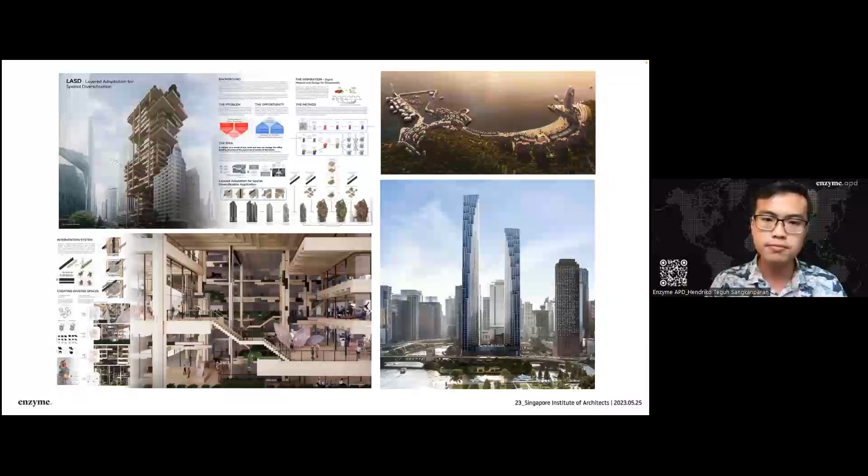In our design firm, we are a group of experienced designers with international experience and a detail-oriented process. We work across different scales: master planning, architecture, interior design, crafting our concepts and design to our clients' needs, bringing together our design expertise with our clients' values and expectations, creating sustainable design environmentally, economically, and socially.

At our core, we are digital consultants. We are digital savvy and passionate about how things are done. We have a research group within the company that explores new workflows and techniques, from BIM to computational tools that we use every day, and we also offer this as a service to our clients.

We are BIM and technology advocates. We are in Hong Kong, an official Archicad training center, and we are BIM experts. Since 2015 we've been the official Archicad training center in Hong Kong, and within our team we have certified trainers and registered BIM consultants. We also travel the world giving lectures and conferences, sharing our experience and inspiring other professionals to work better with BIM, always attempting to stay on top of new tech that improves our quality of work.

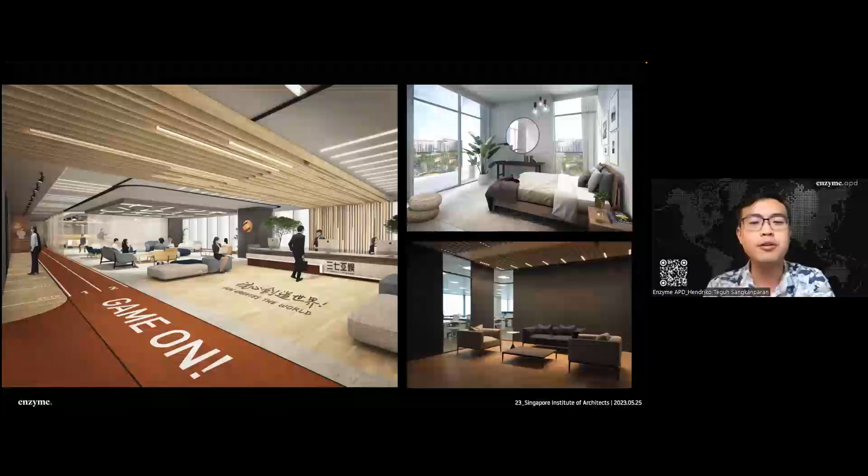We work across various scales: master planning, architecture, interior design, crafting our concepts and design to our clients' needs, bringing together our design experience with our clients' values, from outside, inside, to the smallest details. The philosophy of parametric design allows us to control and expect what is designed, and we have this freedom powered by data and BIM.

If you've looked into computational design, you've definitely already experienced this ability to know exactly what you want and be able to expect the result you want, which is super cool.

At Enzyme, we use Archicad for design to enable our process and create smarter workflows, supporting the integrated design delivery, the IDD process. I'm sure everyone is familiar with this. We look into projects from start to end, and in this talk we're going to focus on how we apply sustainable design in our practice.

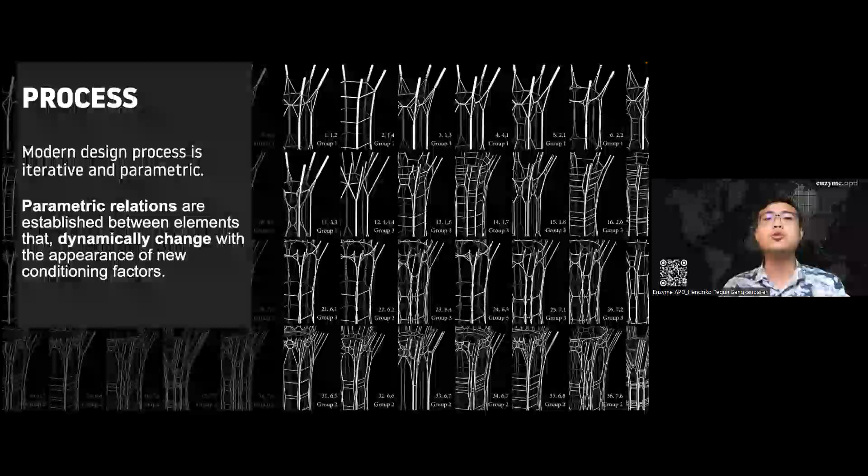With parametric design methodology, we are able to create quick iterations that have proven helpful for sustainable delivery in our projects. This is a very quick video, from a 1.5 hour webinar we did, and it just shows how powerful this is.

Basically, we just create a form, then we're able to divide the form itself and bring it straight into Archicad. With this you can see the process is extremely quick, where all the building design and building elements are already baked in as we want them to be. It's pretty cool to see how computational design and BIM can merge together to inform our design.

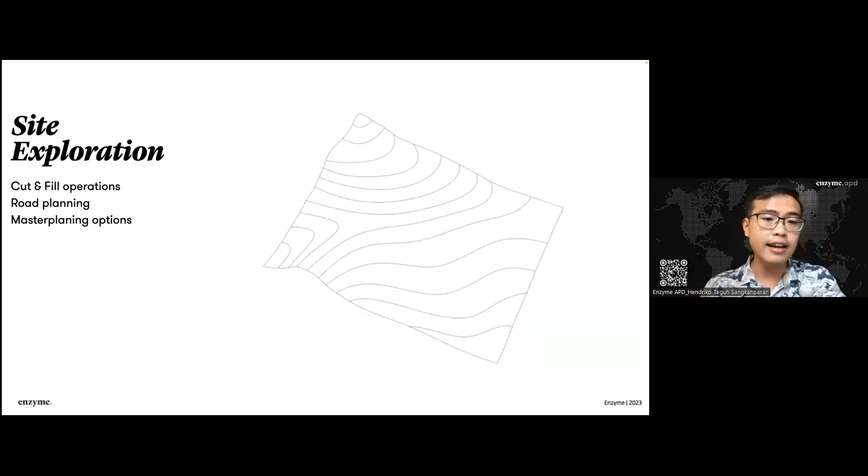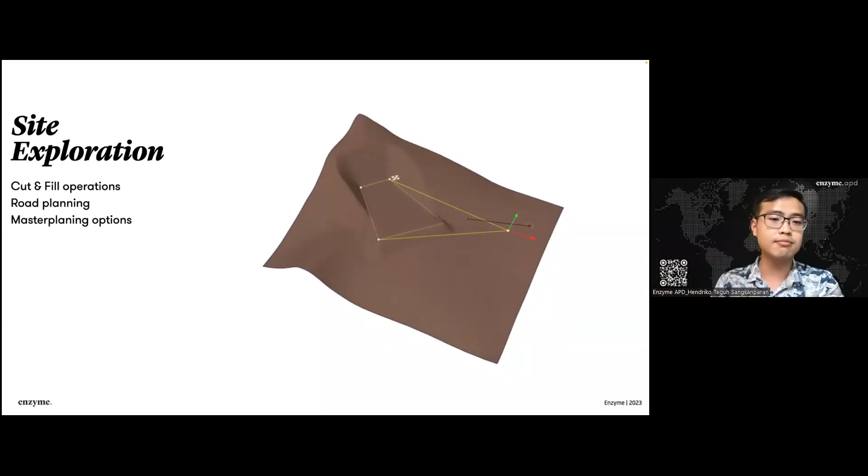Applying the idea of BIM and parametric thinking, we start from site exploration. The site is like point data, so this is just a diagram of how we can modify our sites, a very quick tool. Then we explore the idea of terraforming, because at the end of the day, when designing, we should be able to understand our site.

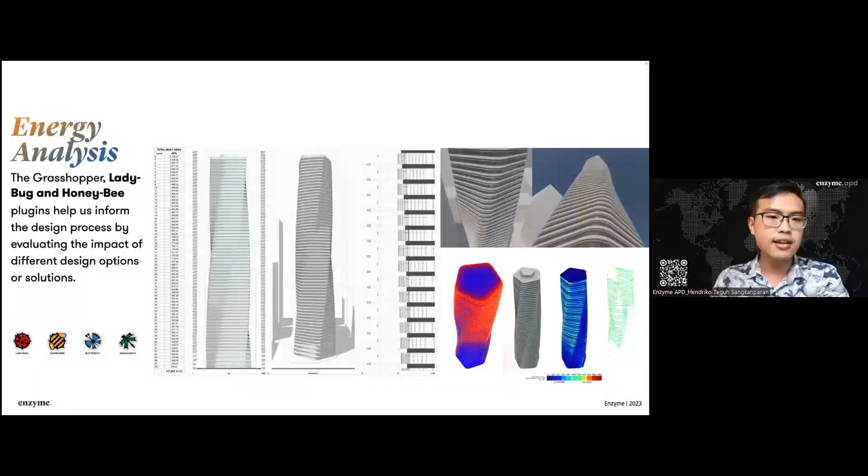We also implement our sustainable design tools from Ladybug or Eco Designer, and then we feed that back into our Grasshopper and data analysis tools to actually give us a better informed design.

And this is an example where we are using Wallacei, a genetic algorithm that enables you to find what is the right design for this kind of plot.

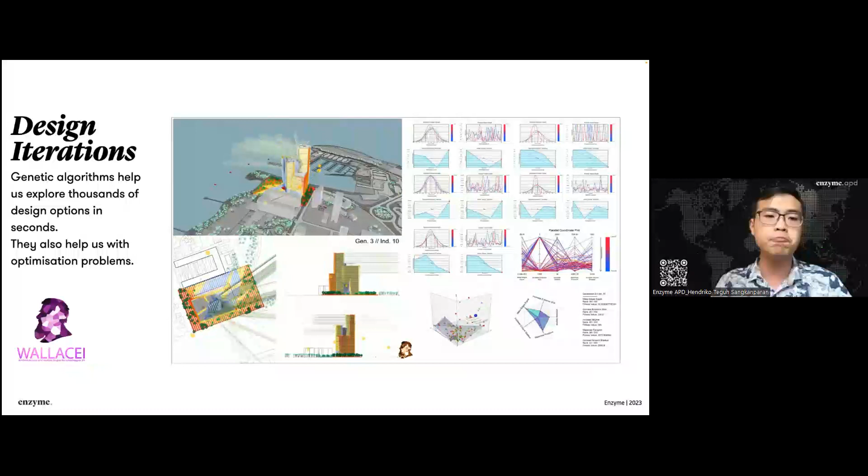And because of BIM, we are able to manage our data quite well. In Grasshopper, we also use this idea of Elefront that helps us manage the data of our elements and how the buildings actually are.

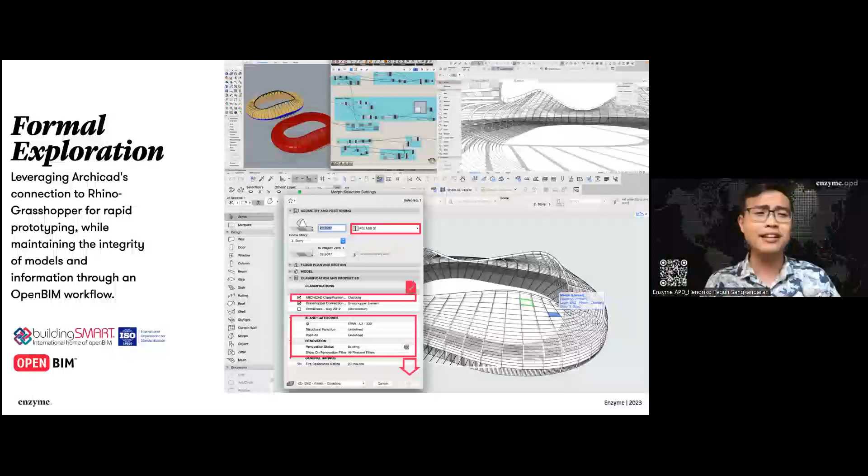So data-driven design, I think it makes sense, and this also helps us in formal exploration. Our exploration isn't messy - it's not about a line that looks perfect, no, it's about data. It's about how we can use the environment and the site to inform our best data-driven design.

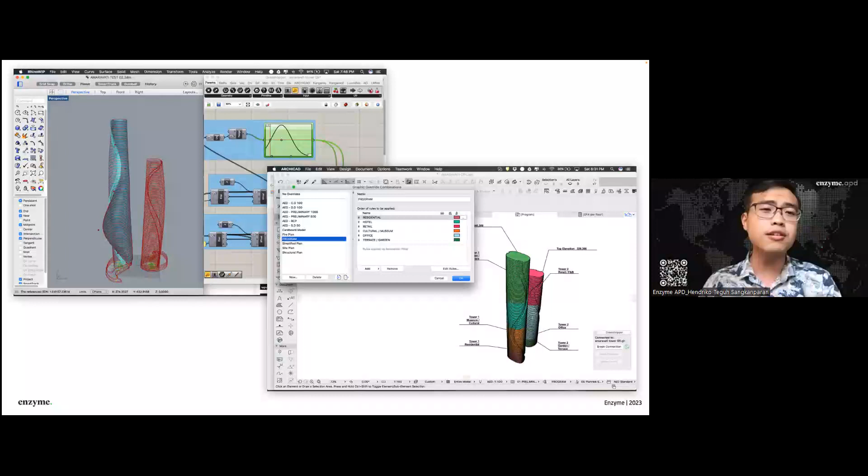So finally, this is the end of how we work. We created this hybrid workflow where we use Grasshopper and Rhino as well as Archicad to create a design that is data-driven and can also be communicated very clearly and well.

During the last 10 years of BIM and other digital tools, we have slowly made our way and changed our practice, how we work on our design, and it has tremendously improved our flexibility of designing.

BIM has changed our workflow for better accuracy, better understanding, better information, better consistency, better coherency. I believe if you've been using it, you know this quite well.

Managing information is much easier now. Instead of referring to sheets after sheets of data, cross-referencing and making sure all is correct, we can now create information baked within the geometries itself - information of material types, the material information like embodied carbon or global warming potential or anything else, all readily available for us to use within the Archicad BIM itself.

So that's how we work. This is our journey - we start from Archicad, that's our genesis, and we start to explore further, understanding the data.

We integrate Grasshopper into our workflow, and finally right now we're exploring how to use even more - using APIs of other software, using Python or Airtable to communicate our design and relate our data to whoever collaborators we are working with.

That's basically about Enzyme and about how we work.

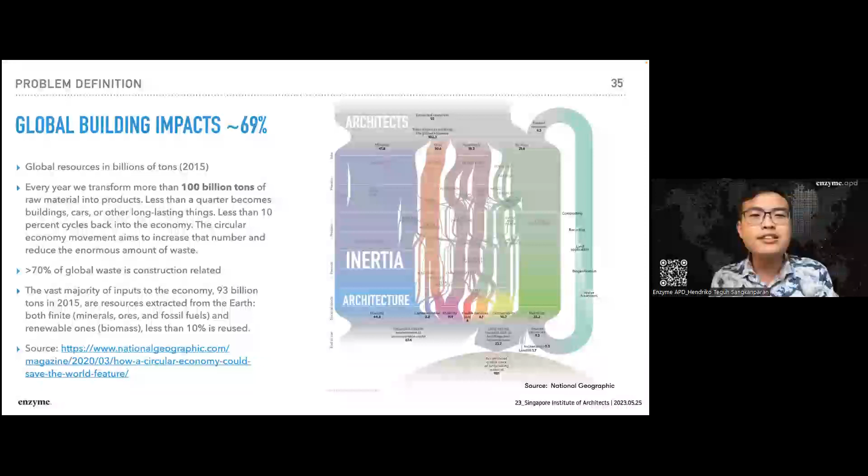In the bigger picture of world impact, our construction industry contributes the largest in extraction of materials from the earth - you see here, it's 69%. The question is, how do we make them sustainable? In the idea of circular economy, we have this idea of reusability, of how we can use the material again, but it's something we need to continue to think about.

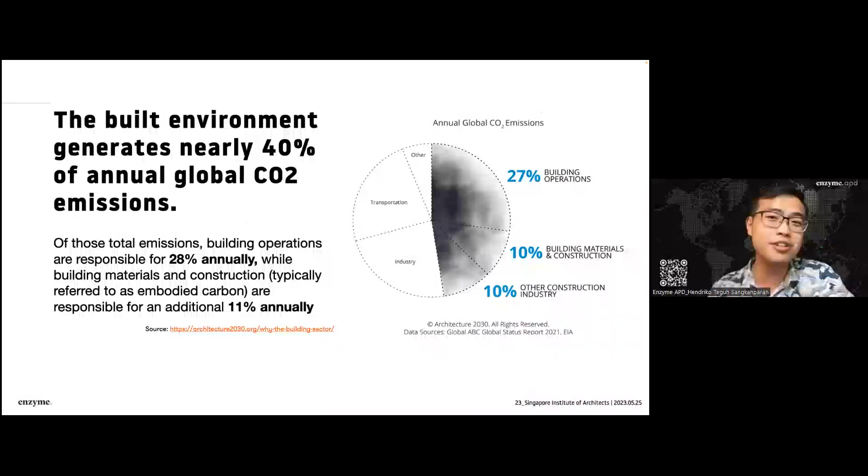So let's talk about something closer to our realm of control as architects and designers of buildings - the process of creation of buildings and their operations. Around half of all non-renewable resources mankind consumes are used in construction, making it one of the least sustainable industries in the world. This large contribution also means there's an incredible opportunity for embodied carbon reduction in these high-impact materials through policy, design, material selection, and specification.

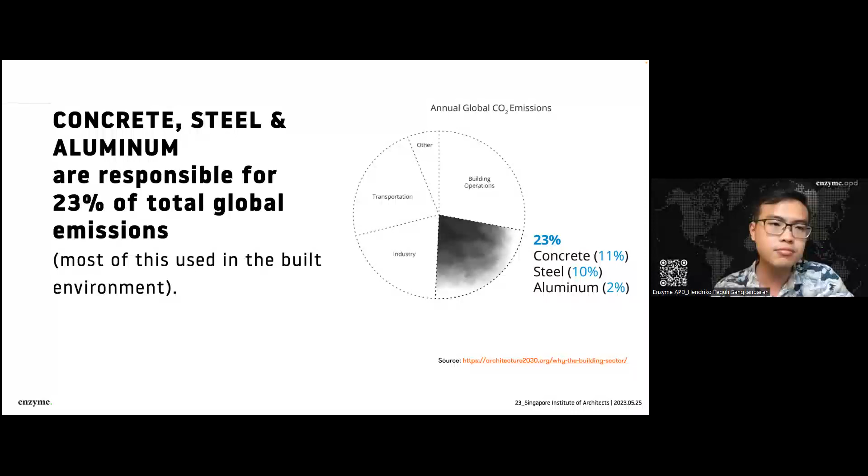So we have some examples from Singapore. Some things about Singapore - everyone is very familiar with this - it's heat, humidity, rainfall, UV, and also at times very chilly wind. I think right now, at least from my window, it's quite nice - it's very cloudy, not as hot as yesterday.

But in bioclimatic design to be effective, we need to focus on preventing the building envelope from overheating in the first place. That's what we should try to do.

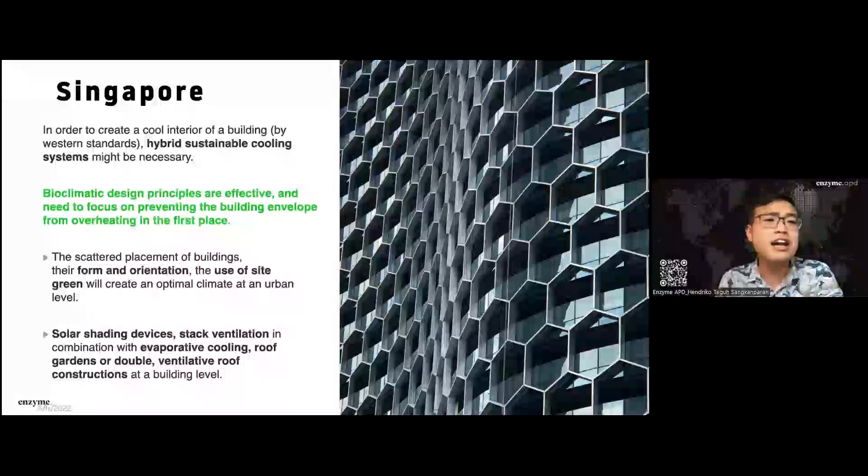Most of you might be more familiar with this project than many of us, but we really like the idea of how we can enhance building with technology that helps us achieve our sustainable goals, combining regional architecture and new technologies, creating synergies and good design for occupants and the environment. We believe as designers of the built environment, we should be inspired by each other and how we can make our world better. So now I'm going to talk a bit about the BIM world.

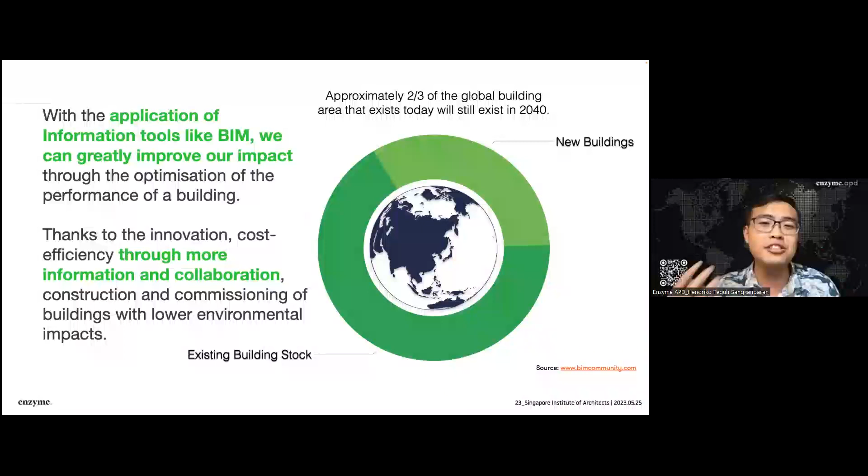The pursuit of sustainability has become one of the principal design objectives in our construction industry. In response to this concern, the integration of building information modeling, BIM, and sustainable practices could have helped us a lot. The built environment cannot escape its responsibility for contributing towards environmental deterioration and destruction of arable land. Luckily, we are living in a world where BIM can assist us. With the application of BIM and understanding its inherent power, it will greatly impact our role in optimizing the performance of a building. BIM is rooted in innovation, cost efficiency through more information and collaboration, construction and commissioning of buildings with lower environmental impacts.

Borrowing sustainable design philosophy from the US GSA, when we think about sustainable design, we should attempt to make decisions that will reduce negative impacts on the environment and the health of occupants. There are many ways for us to actually try to tackle it.

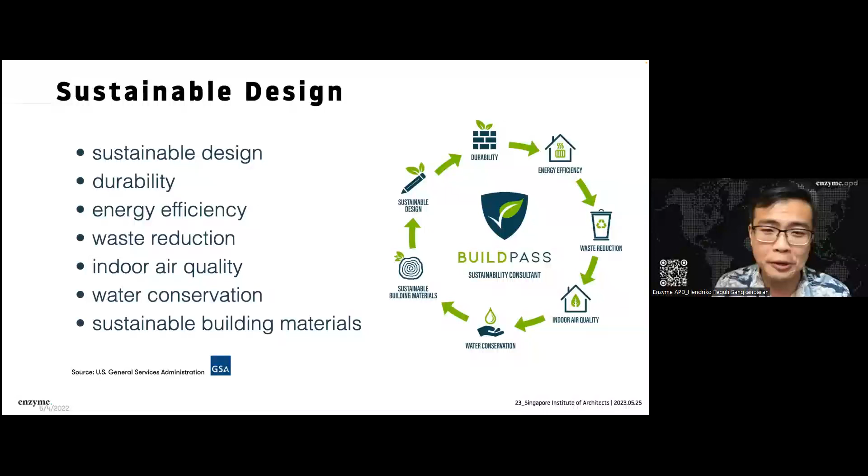Today we are not going to talk about it too much; we are going to talk about how we actually do it. Making better decisions at each stage seems to be the most critical part of achieving more sustainable design. So everything we think about when discussing sustainable design, we should try to think about how we can incorporate this idea of sustainability, how we can change small things that may actually give a lot of impact.

How can BIM help? Through information access, enabling collaboration, and simulation and analysis - these are things that BIM can help with, and I'm going to show you how. So we've already talked about the context, and how BIM might be able to help us. Now I'm going to show you how we actually use it in our projects.

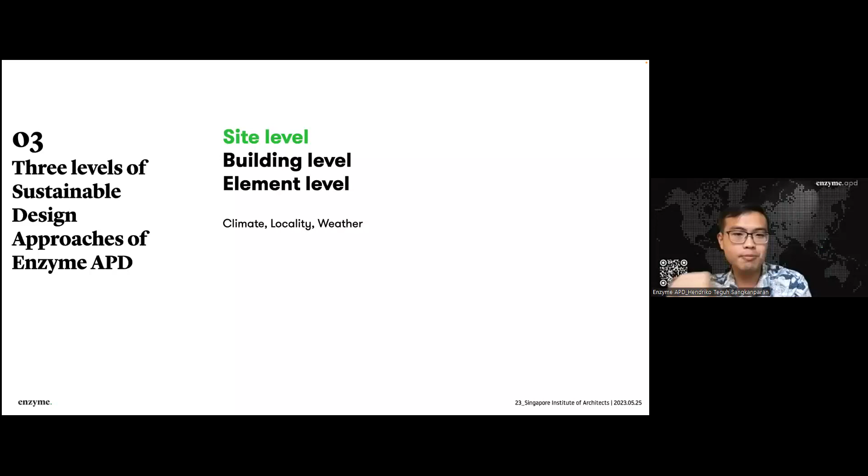First, we are going to start from the site. This project is called Linear Loop City. It's one of our several collaborations with Takenaka and its computational design team. This project won first prize in the Yilong Smart City competition in 2017. It's a great study on how companies can collaborate, giving the best of each other, creating a synergy of design. We are operating in the Archicad environment where we can collaborate across companies and across groups.

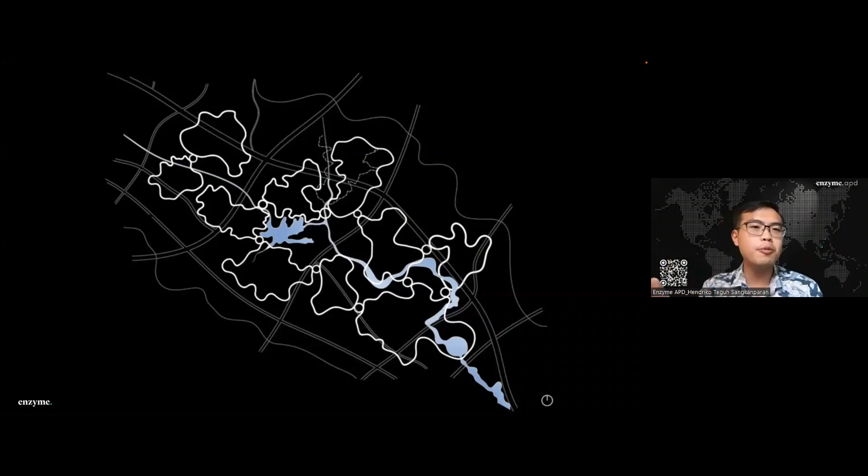The brief was to create a new smart city near Yilong County in Sichuan province, providing homes for 30,000 people, merging rural pre-existing life with the new modern concept of a city. So the idea at the start of the project was to create this loop connecting different city clusters in the most efficient way, acknowledging and respecting the surrounding landscape, because this is quite a nice landscape and topography. We wanted to make sure we didn't intervene too much, keeping the road at the same level to optimize movement of the proposed transport system using smart electric vehicles.

First, we find the best areas within the terrain with the least inclination, in order to minimize terraforming, thus optimizing investment and construction processes. For that, we created a routine in Grasshopper to analyze the terrain, acknowledging the slopes, while also analyzing the potential flooding areas. As you can see in this video, this is a running video of how we analyze the levels from the bottom to the top, and we can see there are areas that are better than others.

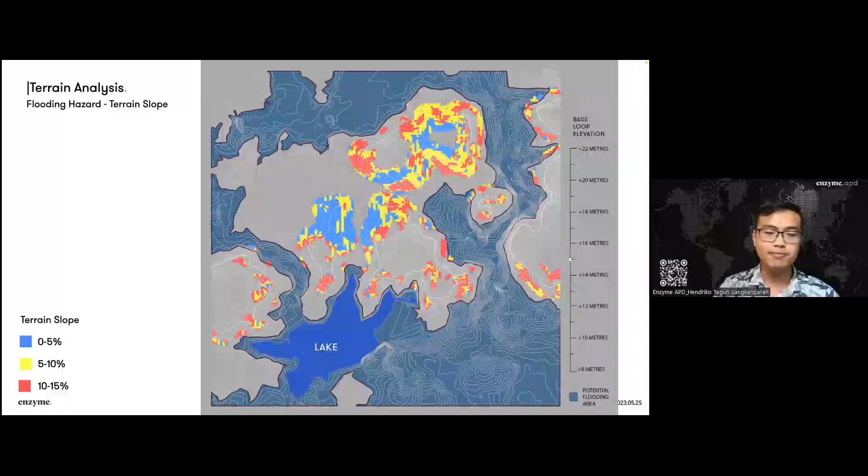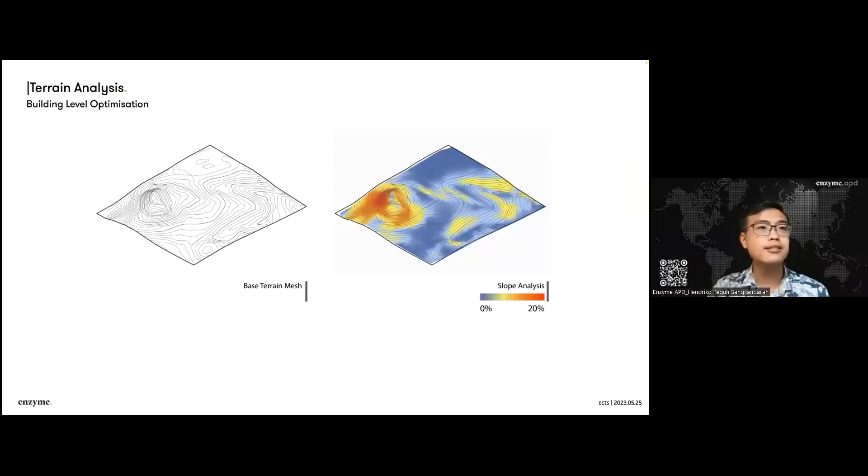Blue means it is less slopey, much more gentle, and red means it is very steep. So this is a simplified way to see our diagram. The Grasshopper script provides us the colored analysis mesh you can see here. The gray area is where the slope is less than 9%, which gives us a preferable area to take as the main level of this whole development.

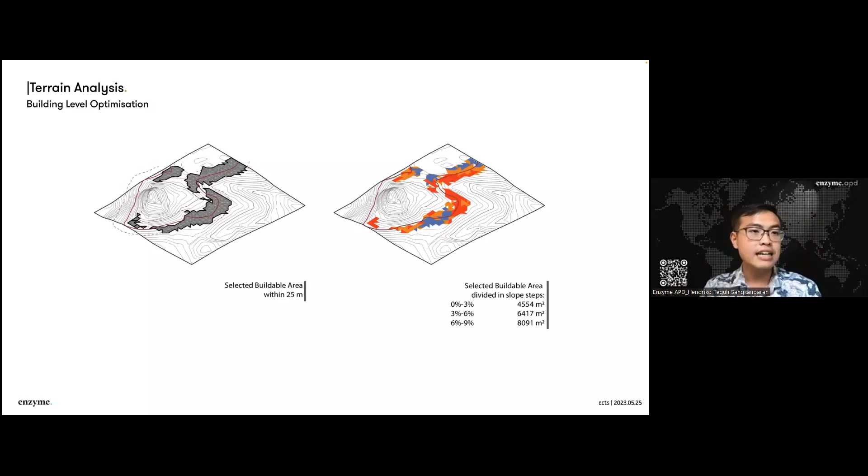After that, we also select the range of proximity of the selected road path, and we are able to see what is the buildable area when dividing according to the slope steps, as you can see in the diagram. So this is what it looks like in Archicad 20.

Now we are in Archicad 26. We can see that information is being processed quite well in Archicad, where we can see all the meshes with the terrains, and we'll be able to look at how our intervention actually is.

One of the greatest challenges of this project is physical size. It's 2 km by 2 km, full of terrain complexity. For this project, one of the most important aspects was to study the terrain, as we explained, to create this loop road.

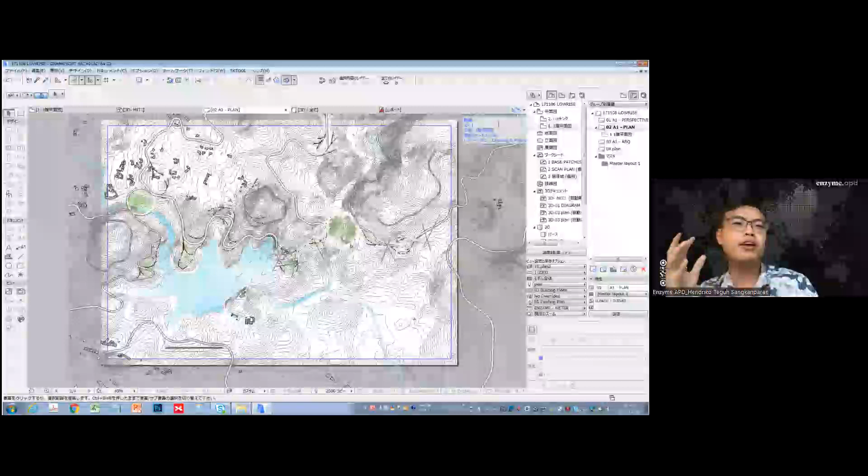Archicad can handle the meshes, but the problem is that when looking into a bigger picture, larger scale, it's quite hard to manipulate. So that's why we opted to look for Rhino Grasshopper to help us.

So this is actually a Rhino model. The cool thing about Archicad and Rhino is we can use this idea of hot link, and we can terraform the road formation in Rhino and straight away plug it back to Archicad.

This can be seen from these diagrams from Archicad. You can clearly tell what exactly is happening around this area, so if it is successful or not, you can see it straight away. It's very quick with very little post-processing.

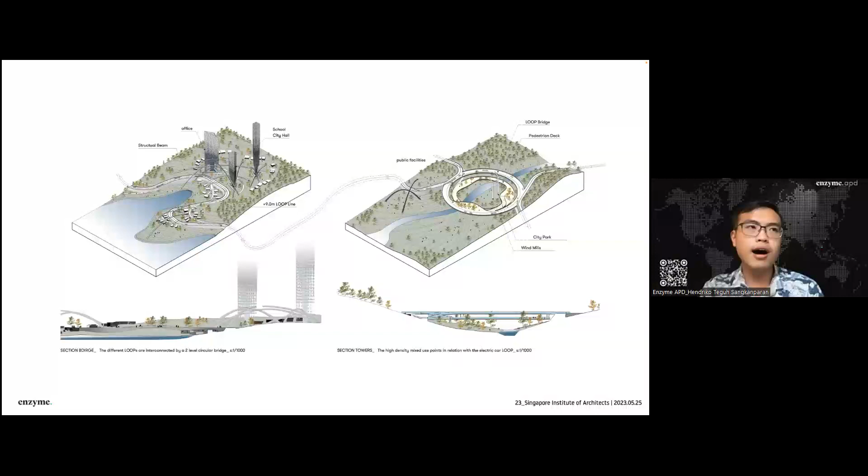So these tools really help us give a much more informed decision of how we can design. These are just some snips of the final boards.

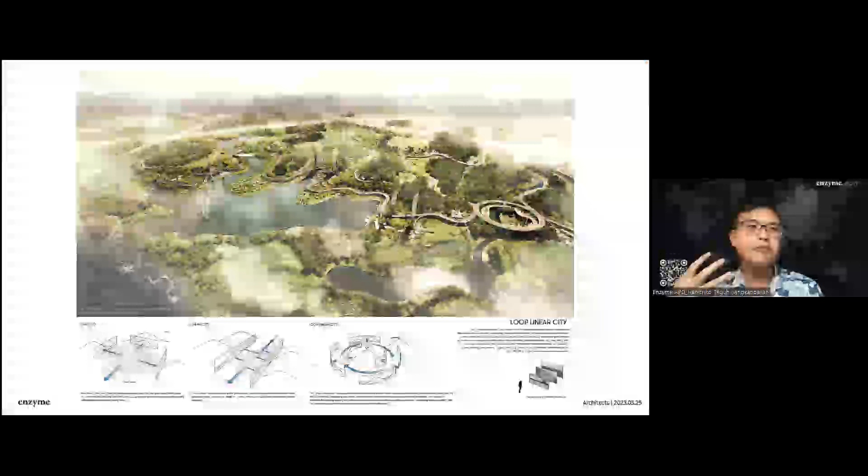The idea of this loop linear city is very important because the site is very beautiful, and we want to preserve as much as possible. This loop linear city helps us maneuver through this whole terrain instead of creating a flat land and calling it a city. Yeah, it's pretty cool. So this is how it looks like.

So with that, we talked about slope analysis to basically locate the axis of our building. We can start sustainable design from the site level. Now we are talking about the building level, which is a bit different—we are looking into deeper how the building actually works in certain site conditions.

This is a KL project, the KL Heart competition, a collaboration with Plus 8 in Kuala Lumpur, Malaysia. The tools we use are Archicad, Rhino, and Grasshopper.

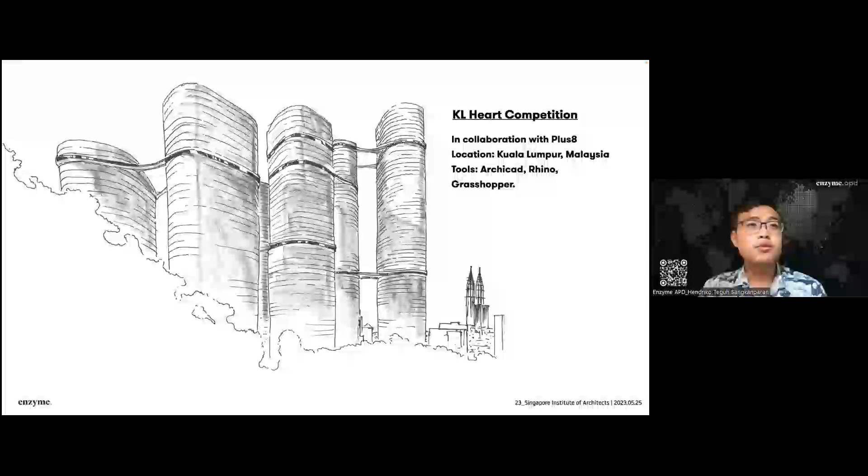This project site sits in a very prime location, just beside the Menara KL, in the middle of the Golden Triangle. It is the last mature rainforest within the city itself. It has a complex topography as it sits on a slope, as we are going to show you later.

One important feature of this brief was how our intervention sits on the whole cityscape scale, so skyline is very important. We need to make sure our design has some relationship with the Menara KL and also the Petronas Tower. It is a massive development of 500,000 square meters with a plot ratio of 14.

For this project, we would like to emphasize the importance of preserving the pre-existing condition as much as we could, because this is a mature rainforest. Our main idea is to lift the ground floor instead of creating blocks, which is common in the surrounding areas. We want the landscape to flow within the ground floor itself.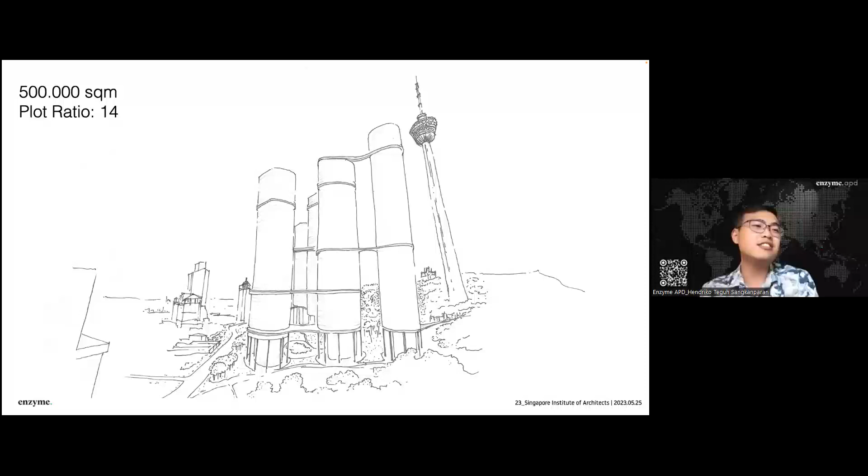So as you can see, this is the ground floor plan. We can see how the buildings actually maneuver through the landscape itself.

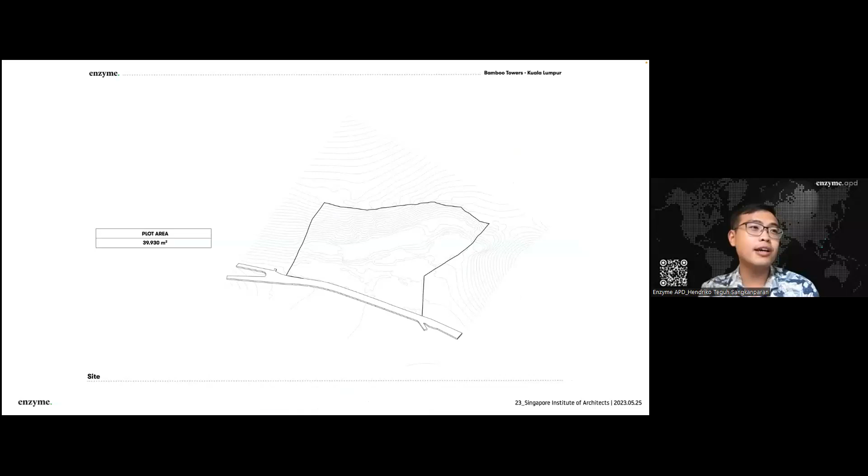So we can see, I want to explain to you a bit more about the slope itself, the site condition. So this is the site terrain. If you can see, it is actually quite slopey.

If you can see here, this is the steepness analysis. We basically look for areas where the terrain is actually the most flat. With that, we are able to locate the foot of our buildings, and with this idea we are able to make sure as much as possible to reduce the intervention in the ecosystem that we have here.

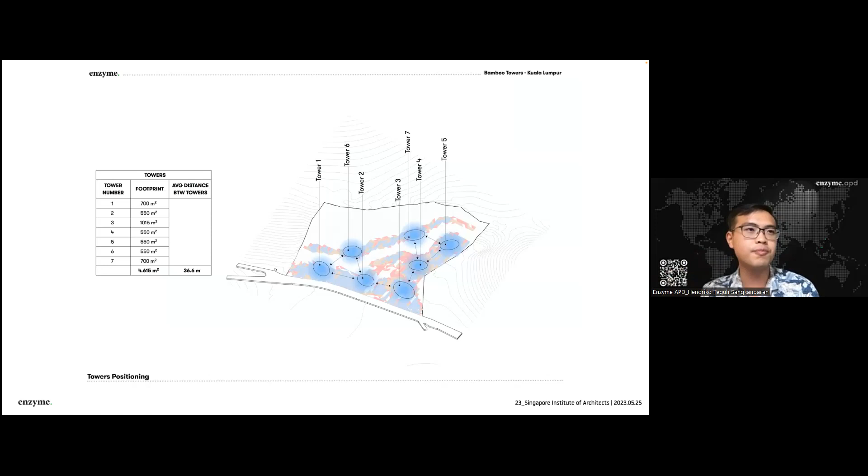So we introduced the main axis throughout the project, and this is the whole script. At the end, if you see here, it is actually an Archicad connection. So all our design that we did in Grasshopper, driven by the technology and the data, we can straight away pull it into Archicad for visualization and a better understanding of the building.

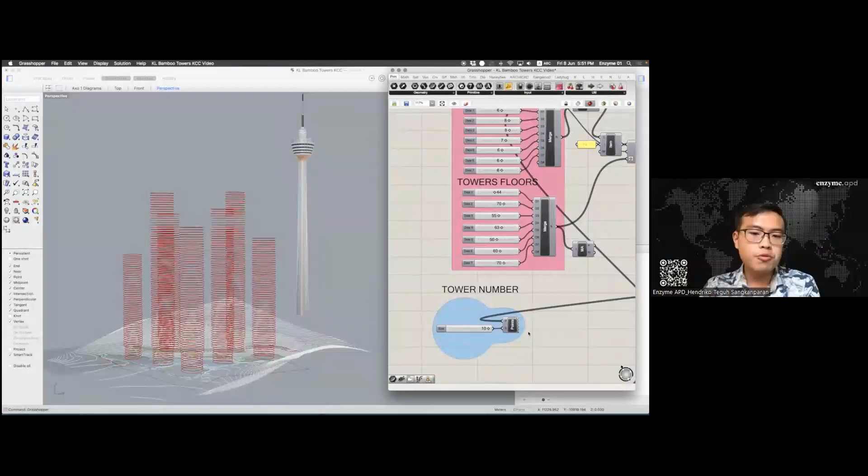So this is just a video of the whole process. This is a steepness analysis, and we are locating our site. With Grasshopper, we are able to find this location and basically create operations that help us design much quicker instead of drawing one by one.

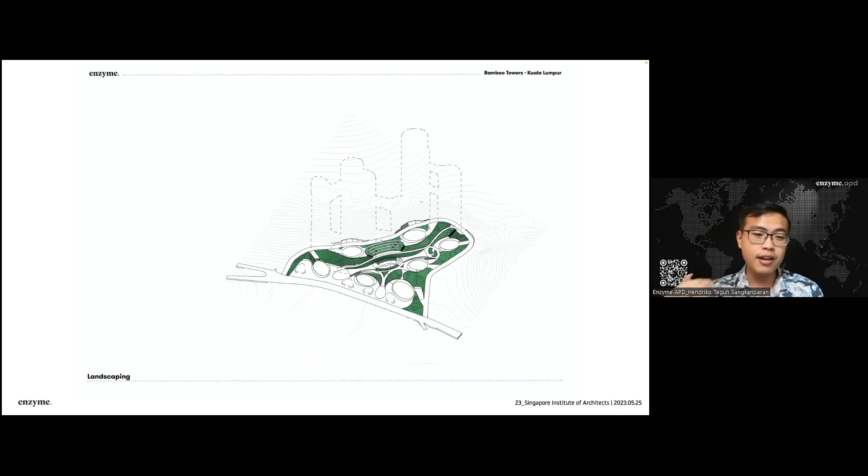So for our project, even if, for example, the site condition impact is not what we show, maybe there is better information available, we can just move our points and make sure the whole script runs again, basically creating an iteration of the design. It's very quick and very good for us because we are data driven.

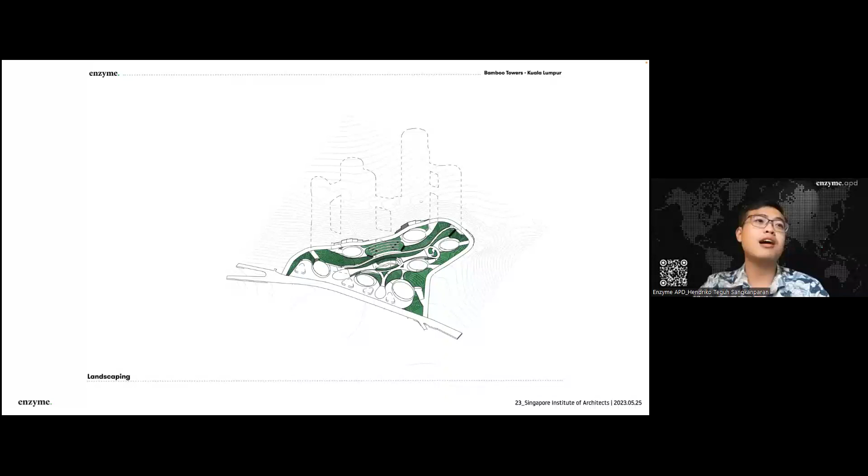So this is some diagrams that we use to explain our idea better. These are the site conditions where the greens are within the project itself. This is the automated parking, because we want to make sure we have the least road as possible. And this is the building mix of this project.

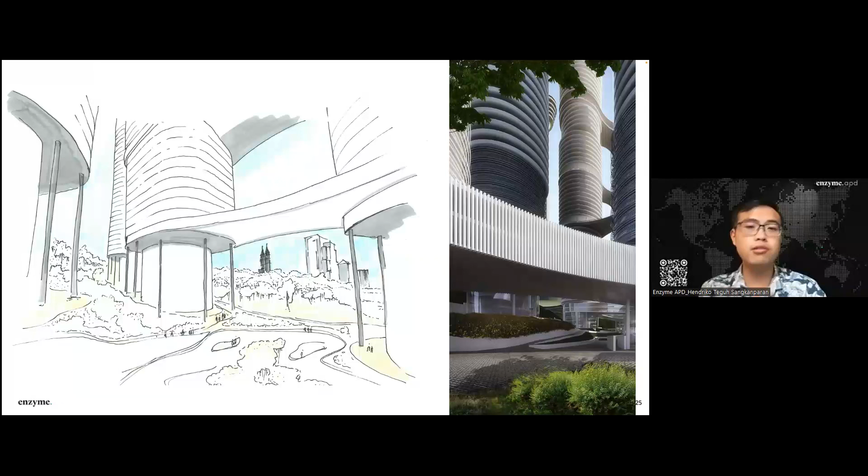And this is how it might look like when it is connected from one tower to another. So this is just some visualization of how the building is, and some sketches. And this is a render of how it sits in KL.

So that said, we talked about the site, where we are looking into the bigger picture. Then we talk about the building level, how we can place these buildings to our most benefit, and also help us create much better design reacting to the site itself.

So now we are going to show you an example of how we can integrate it even deeper to the element level itself. We are going to show you an example that we did. It's a cool project, a very collaborative project. This project is called the Net Zero Building.

It's a competition, a research project. It's a project that we did with Andy Thompson and many other experts right here. It's located in Hong Kong, and the tools that we use are Archicad, Rhino, and Grasshopper as well.

So the site is around 6,000 square meters, with 4,000 square meters of buildable area, 94,000 square meters of permitted GFA, with 2,000 green area requirement for this project, and 1,000 of them have to be on the street level.

So for the first step of this project, we need to understand the project site condition compared to our other projects that we showed you just now. This project is actually a small little plot that is surrounded by buildings, so we need to understand the buildings and how the whole system actually works.

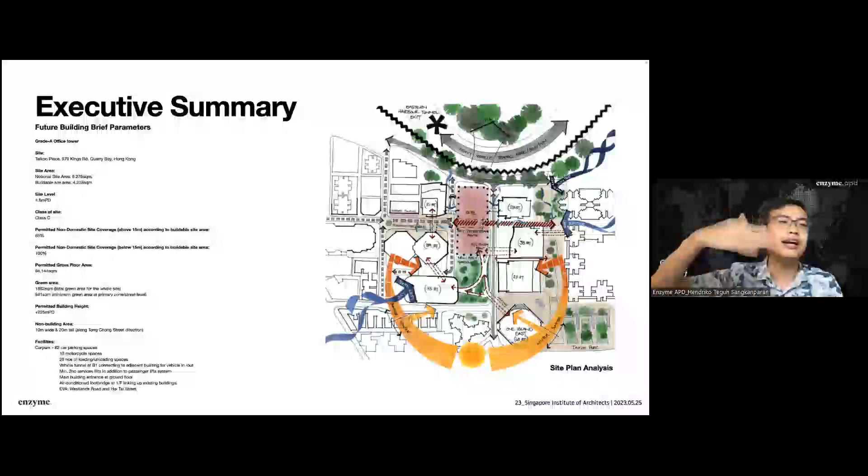Then from the northeast and east area, there is this summer and winter wind, and the sun is predominantly coming from the south side. Yeah, because this is a Hong Kong project, it's not like in the equator, where we are exposed from the roof.

So this site has an unblocked sea view, which means it has direct sea wind exposure, and being at the edge of the city, the project is at the beginning of the urban heat island effect. With all these parameters understood, we start by looking into a concept where we can use this heat and wind to our use, so that our building is better.

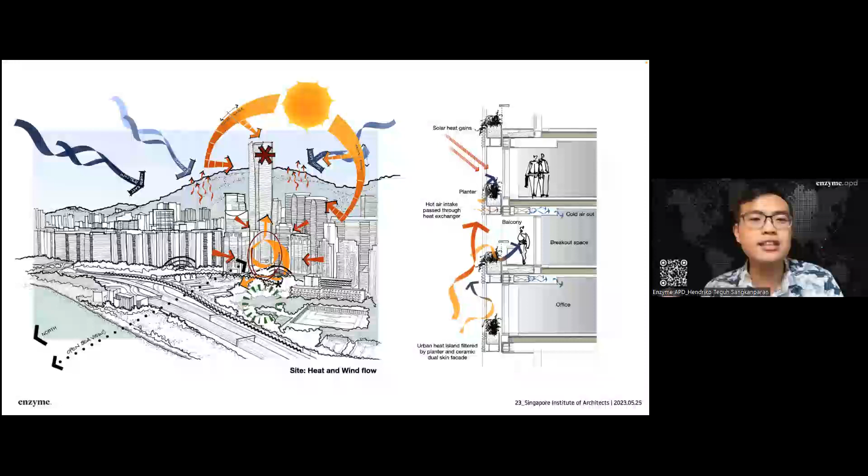So on the right diagram, as you can see, is conceptually how the building should work, where we utilize the heat and the wind to actually help design our space. The urban heat island is tackled, also with the idea of a double facade cooling system with planters fixed in it. This is the site.

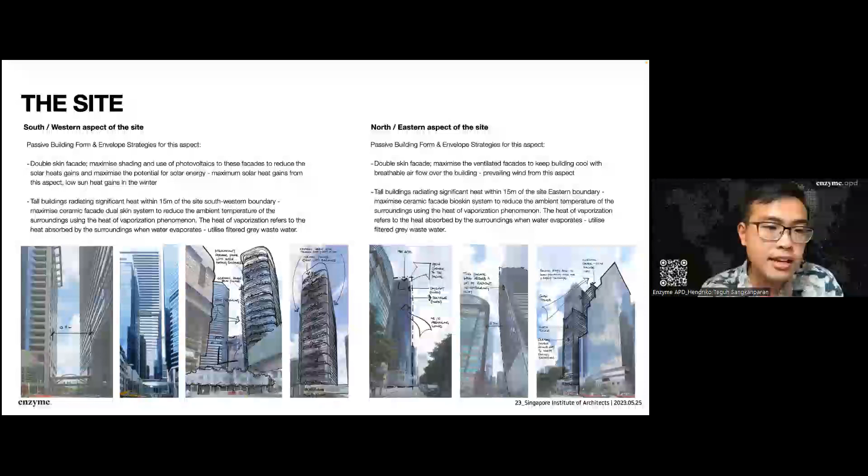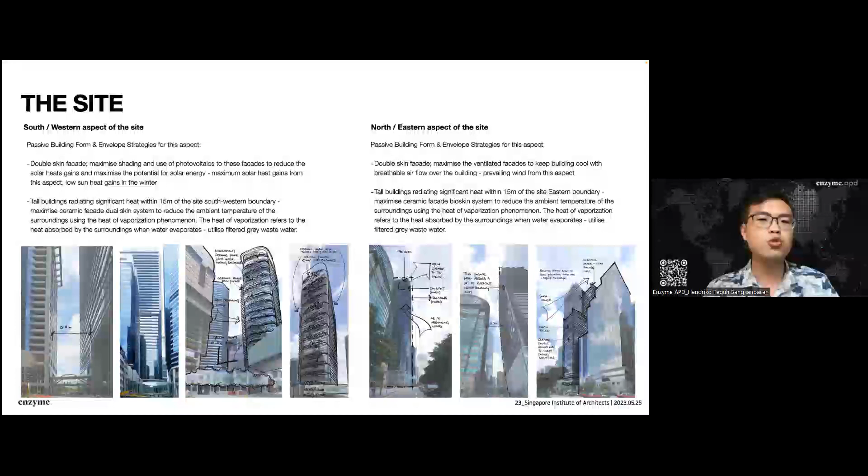As we've already explained, the south and north are quite different in how we need to tackle them. The south is where the sun is, so we locate photovoltaic cells there to gain solar energy while also providing shading to the space. In the north, where there's prevailing wind, we use a double facade system to help mitigate the wind, creating breathable ventilation we can use. Overall, for this whole building, we also thought of using a ceramic facade system that enables overall cooling, which we'll explain later.

So for this project, we are quite intense in the sense that we are looking into the data of each and every single point we're trying to make. These are the approaches we have. We have 9 approaches that I'm going to tackle one by one for you.

So the first one is this idea of the right material in the right places. As we all know, when creating buildings, what's important is the construction system itself. The core takes a lot of the embodied carbon in our building. This is important, as we mentioned, the construction industry takes a big chunk of material extraction from the earth, contributing 40% of carbon consumption yearly. So it's very important for us to try as much as possible to offer low embodied carbon options.

When we talk about material choice, there are things like bamboo, highly engineered bamboos that can be used in our structure system, or green concrete, like carbon-cured concrete for our core, that basically lowers the overall embodied carbon use for this project.

So there are 5 things that we thought were very important. The first one is the minimization of load-bearing elements, in the sense that we have to try to create the grid as effective as possible instead of creating cantilevers or transfer elements. We need to be able to create an effective way to structure our building.

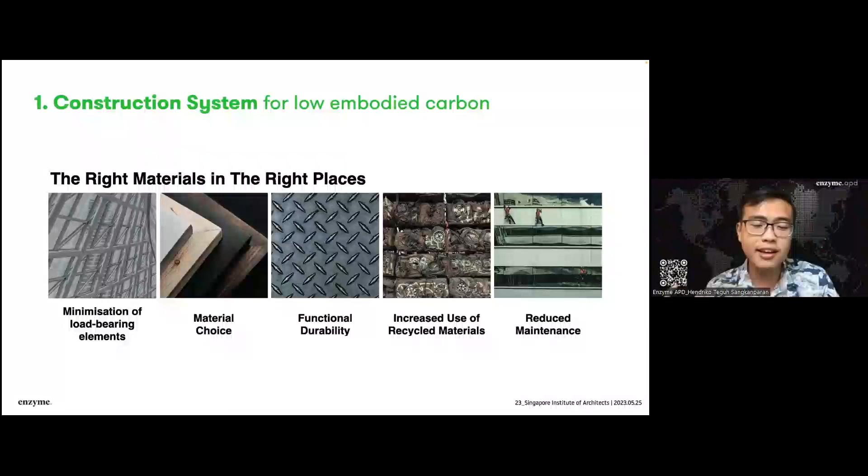Lastly is reduced maintenance. This means we need to find something that is right for that condition. So we're not using, for example, corrosive steel in the sea that'll get rusty and need replacing, or paint that doesn't last long. We need to think about this and make sure we're trying to reduce the carbon impact as much as possible.

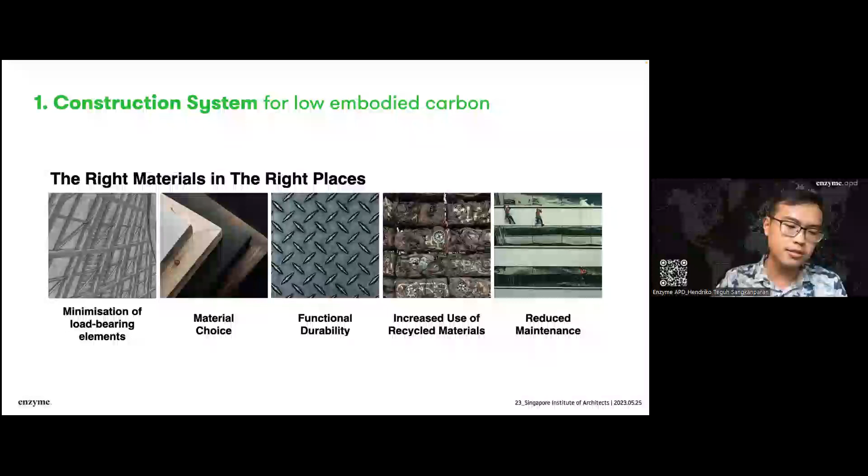Next, at the building level, we're talking about the massing as well, and optimizing it for the site condition. To achieve net zero, we need to try to minimize the energy used during the operation of the building itself. So just now in the beginning, we talked about the materiality and how we can actually create the structure of the building.

We need to look into the massing that we are actually using. So if you can see here, we have this building that we designed. We have two towers, one shorter and one taller, and that is for a reason. We'll talk about it a bit more, including the shading, on the next slide.

When we were talking about the double facade, we also have to use the prevailing wind instead of preventing the wind from coming in at all, because at the end of the day, this wind is actually free energy for us to use. If we can optimize and utilize it, it will be awesome.

Then there's the utilization of microclimatic effects. If we are introducing gardens, parks or water bodies on the ground level, we shouldn't let it stop there. We can use it to improve the site condition of the ground floor as well. In this project, we elevate it from the ground plane to allow the public realm to be naturally ventilated, with connection to a new urban park that creates this hydroponic tower, allowing for ambient cooling from the water vapor of the ground floor, and enabling community-centric activities like hydroponic farming.

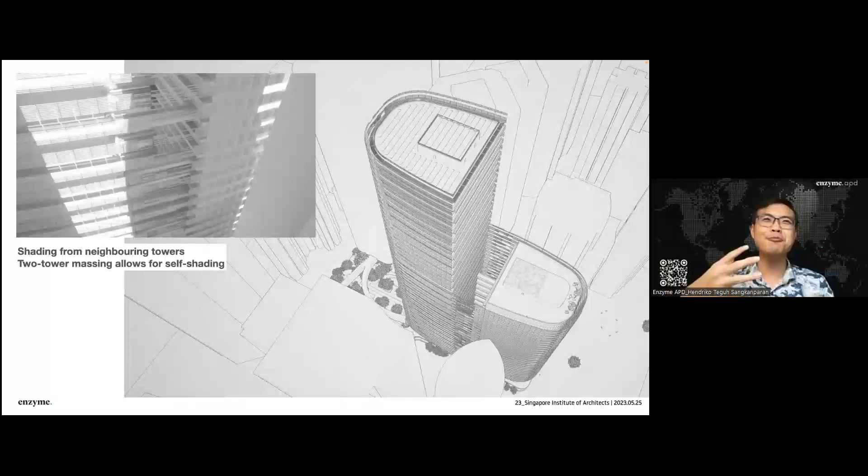By utilizing this massing strategy, you're able to reduce a lot of heat gain. When talking about facade, we can discuss double or triple glazing, which helps, but at the end of the day, with the urban heat island effect, all this reflected heat will still be there. It's not going to be absorbed, it's not going to help, you're going to actually worsen the surrounding condition. So this is important for us to consider.

We talked about the facade design quite a lot, so I'm going to go a bit deeper here. This is what we are opting for: the idea is to create a double facade system. When using a double facade system that doesn't have too much reflective elements, we're able to prevent this reflection of heat from the sun that creates a more intense urban heat island effect. By using this double facade system, we can lower it down and make sure that not only is the building cooled down, but the surrounding area is also much better.

There are three purposes that facade can contribute. The first is reduced energy consumption. If we create a facade system that filters out the heat instead of reflecting it, reducing the urban heat island effect, it can help the air quality intake that we're going to use later, which I'll show you. The next purpose is to mitigate the urban heat island effect, and the last is to improve outdoor air quality intake. This last one sounds far-fetched - how can the facade system improve outdoor air quality intake that helps the indoor? But it is possible, and we're going to show you how.

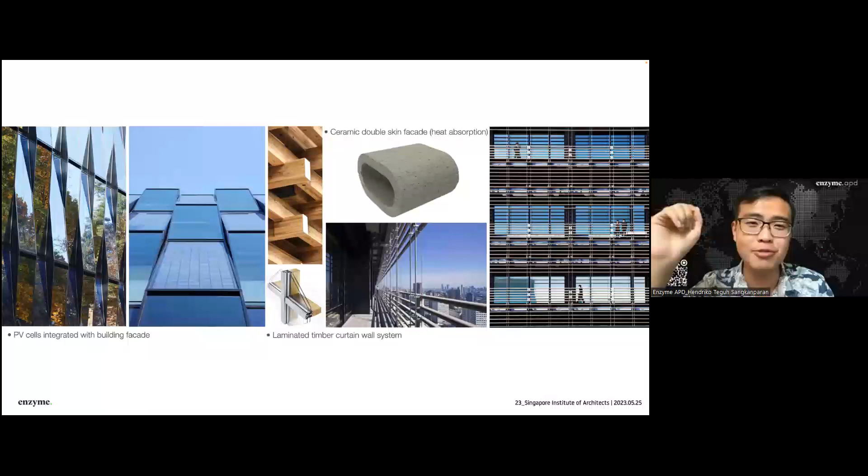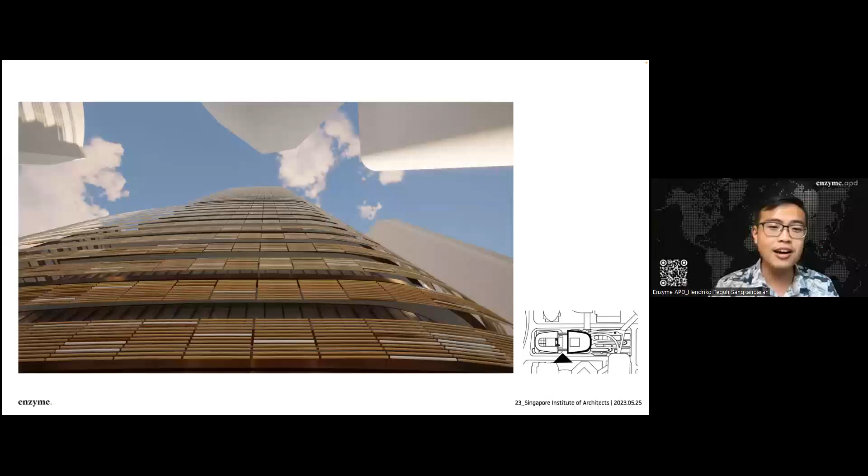Using ceramic water pipes that we opted to use, research shows there is a possibility of reducing the heat of the air from outside by up to 12 degrees Celsius, compared to if we just suck it in and put it directly inside our building. With that reduction, there's a lot of impact - for example, if your air intake is already cooled down, when you want to cool it down further for air conditioning, it takes just a bit less effort.

It takes way less energy to reduce temperature by 1 degree compared to reducing it by 15 degrees. So by choosing a system that pre-treats the air before we use it, that's going to help quite a lot. Using these systems, we hope we can reduce the urban heat island effect as well, which is very important.

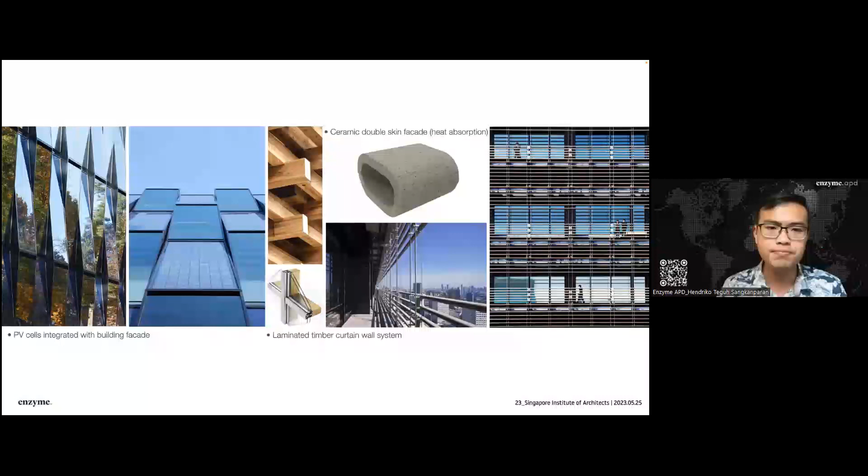The next one is passive energy to reduce overall energy demand. So how does this work, and how can we actually use it? Knowing the locality's opportunities and constraints is very important. As this project is located in Hong Kong, we have sun and heat as both opportunity and problem, and constraints like rainfall, wind, and hydrology.

So the sun and heat, I think it's quite simple and straightforward. We are using photovoltaics to capture energy to use for our building, reducing our energy demand for electricity.

Then the double skin facade also helps reduce the heat overall for the whole building to be cooled down. The next one is rainfall, where we use rain harvesting and an HVAC system that utilizes this harvested rainwater to help cool down the whole building. How it's used is, as I mentioned, through ceramic pipes - we run the water through these pipes, and it helps cool down the whole building skin.

The next one is wind - how we can use the ground floor and the massing of the building itself to take advantage of the opportunities we have. For example, by lifting up the massing, we're able to use the wind that already exists in the surrounding area. The double skin facade, as explained, lets us regulate the strong wind at higher levels so we can actually use it.

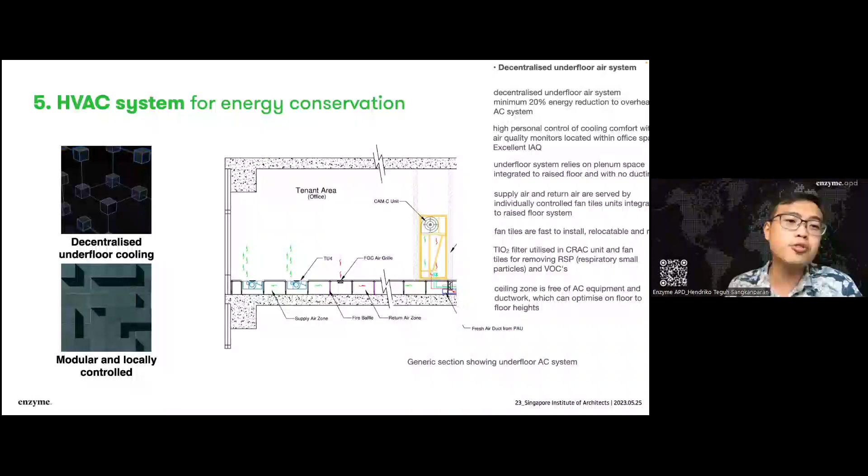This system also allows for separation between the corridor and tenant areas, which can be individually controlled, making the whole system even more effective for the project. Each system is also equipped with filters and sensors to ensure the quality of air within the spaces.

This new air unit is a high performance heat exchanger. It cools pre-treated air and dehumidifies it as well. In this project, using this heat exchanger, there's always still a byproduct, like hot water or something like that. We can actually use it for our F&B, cleaning, bathroom, or gyms and showers for the whole system.

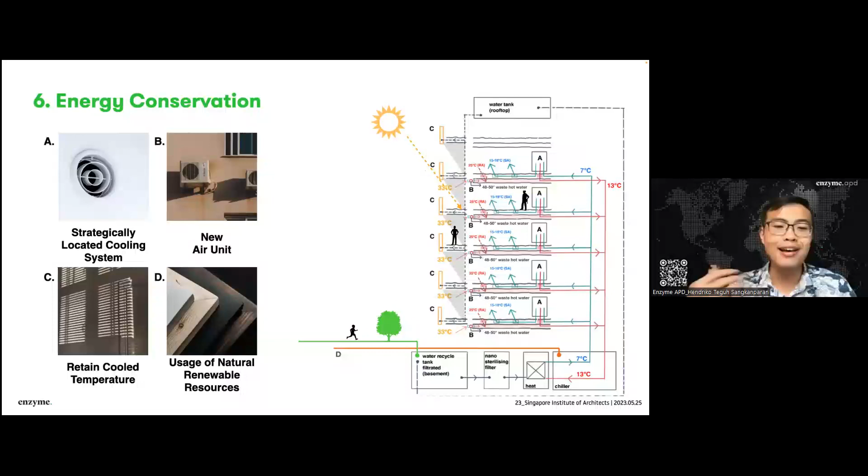Next is this idea of sustainability that is community focused. When talking about sustainability, very often we only talk about the idea of embodied carbon, how much energy we consume. But sustainability is not only about that - it's also about the people that use the space and how we can improve the life of the people around us.

With these resources, the byproducts used for the whole building as it's being operated, we can use this rainwater from the processes and supply it straight away to hydroponic or aquaponic farms that can be interesting for the community to use, closing the loop of the whole system, and also producing vegetables for the community, which is cool. So sustainability is not only about the building itself, it's also about how we can help the community around us.

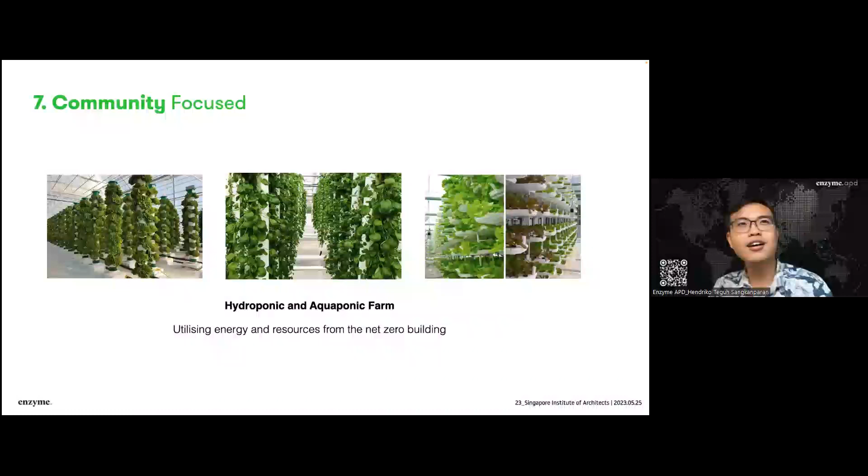Finally, this is a very important concept, and actually very easily usable for all of you in many of our projects. In this project, in partnership with Clestra, the smart partition system manufacturer, the partitions are removable and fast. But the thing is, when we create office spaces with partitions, it's very fast, but you're not able to reuse it if you didn't think of reusing it from the beginning. A lot of this partition actually gets knocked down and becomes waste for the landfill - one of the largest pollutants of our world from the construction industry. This Clestra system enables this partition to be reconfigured, reused, maybe within the building itself or even outside, because it's a modular system.

This system is very quick to assemble and disassemble. For example, you can call them in the morning, they install the partition, and the next day you can already use it. It's a very quick and modular system, and even if you don't want the partition there anymore, you can remove them as quickly as it was assembled.

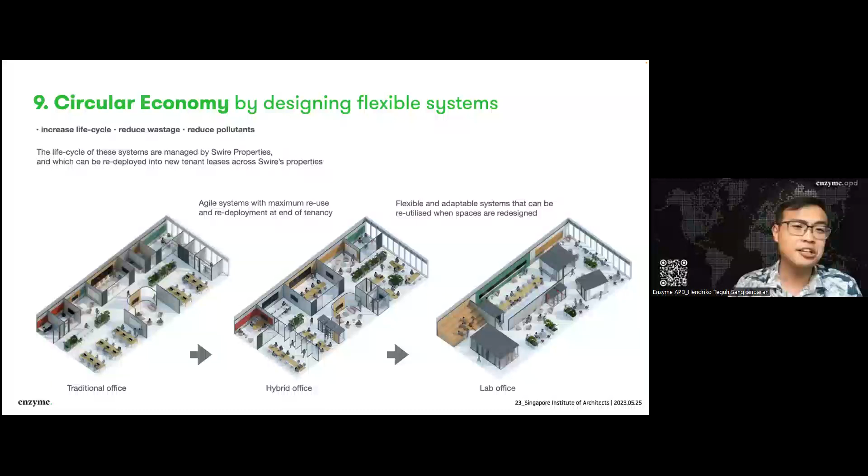Just a small story - because we presented this project to the client, to the developer, it's quite cool because they actually took this idea to their project in real life, where they used this Clestra system for one of their temporary offices. Using this system, when the office space is leased out, you can just remove the partition system and everything will be fine, and reuse this partition system again for other projects the developer has. So maybe it's something interesting for you to look into.

So the last one, this is very important, the data and calculations. When we look into buildings, we've been talking about concepts of how we can reduce it from the facade side and so on.

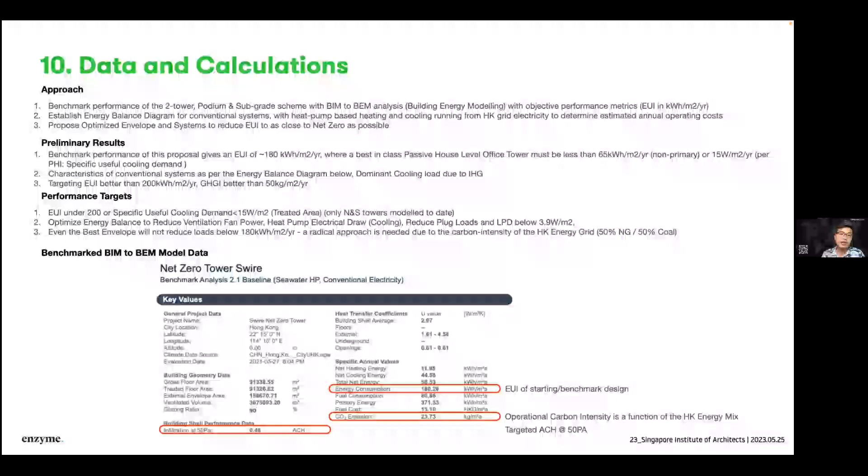But then we have not talked about how we can actually look into use of BIM to actually help us. When we are using BIM, we are able to find and input the data we acquire from the world and surrounding, and assess how it's being used in our project. We can extract key variables of the buildings from the locality, the energy cost, the grid load of how the grid is generating energy—basically performance data.

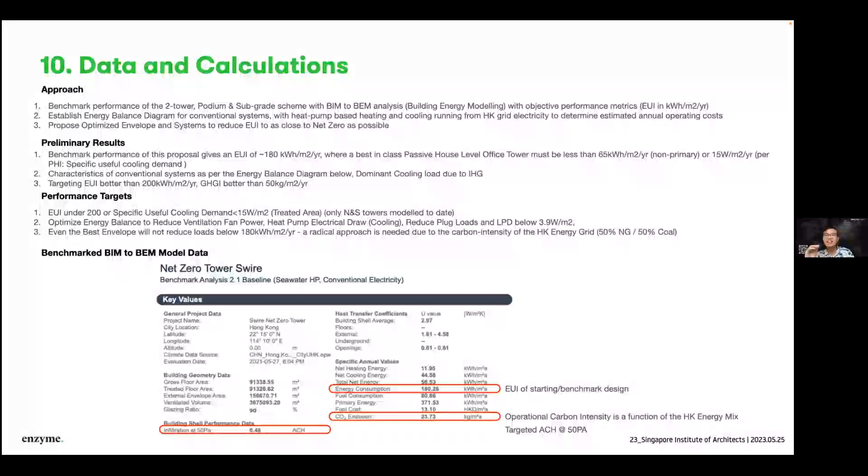From then we can look at how to optimize this whole system, because at the end of the day, when we optimize things, we need to know what the benchmark is.

So this is just a slide to show you what are the things you can actually gather from the building project itself and from the surrounding. So here, this is a benchmark targets to be optimized.

We are understanding the whole similar typology of the buildings, then we find the areas we can improve. Thanks to tools like Eco Designer in Archicad or Ladybug, we are able to understand the use of energy into even granular sets of data, like the day, the date, the hour. These things are very useful for your projects if you are looking into sustainable design.

So this can help us find construction solutions, and even find different solutions and test them out, to figure out the best way to move forward to create our building.

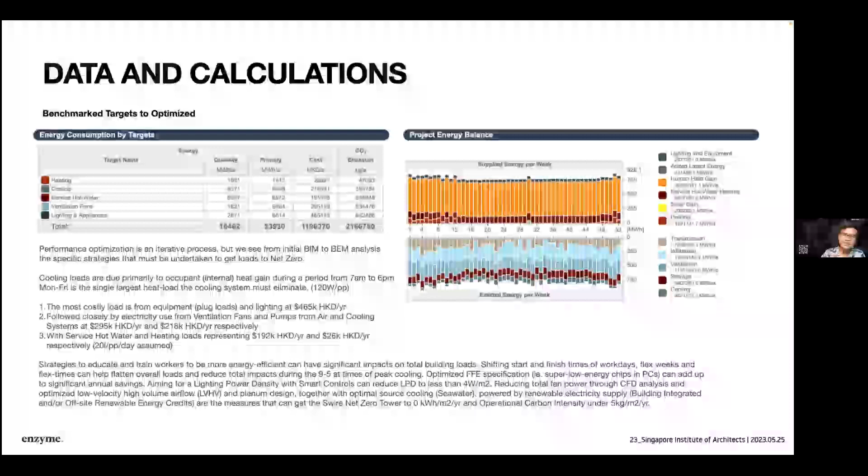Sometimes from this collaboration project, we found that at the end of the day it can be a facade design solution, it can be an MEP system solution, or even maybe it's about the usage, the people that is using the space itself.

If you see the small text there, maybe one of them is actually how we can educate people on how to use the system. These are just some images of the whole project.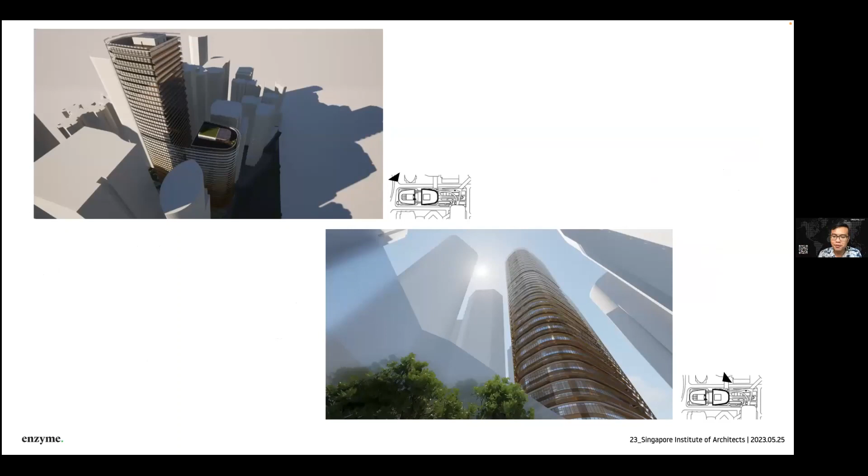So that's basically the three approaches that we use: from the site, the building, and finally the element. Now we are just going to have some concluding statements, in the sense of how we can wrap this up and understand how we can utilize the system hand in hand.

Our built environment and its interactions with the natural environment are very complex, and have a massive impact on the world around us. Hence, sustainability is a complex concept which encompasses not just energy, but all the resources needed to support human activity.

A large part of building sustainability is concerned with addressing global warming, driving climate change, using energy conservation, and techniques such as life cycle assessment to maintain the balance between capital costs and long-term asset value. It is also about enhancing biodiversity, creating spaces that are healthy, economically viable, and sensitive to social needs.

Rather than constantly battling against the natural environment, we start to respect the natural systems and embrace them, learning from the ecological process, creating a better balance between human need and the wider environment. Our good friend Andy said any architect could design zero carbon buildings with a bit of help from a good set of tools. So we want to show you how we actually use our tools.

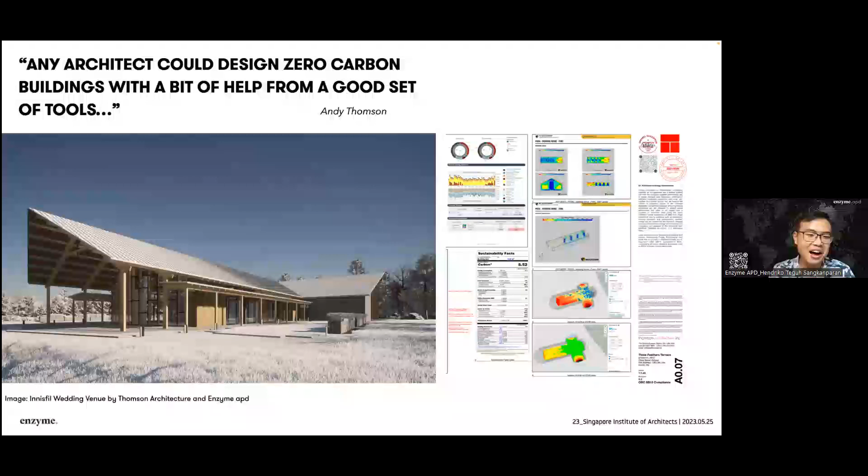So this is standard tools versus custom workflows. As we have touched upon some of the ideas, we have Eco Designer, Ladybug, and all that—these are standard tools. But then how can we help ourselves to make it even better? So in Enzyme, what we do is develop Graphisoft Archicad GDL objects, custom objects that help us understand our building system.

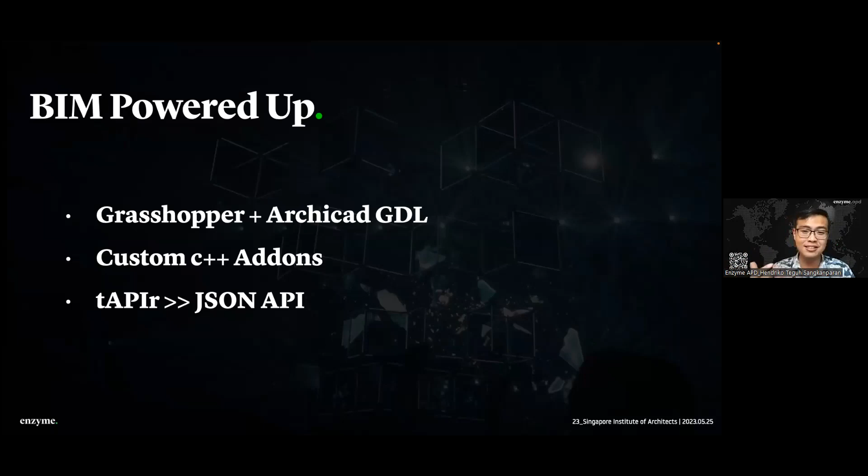Then custom C++ add-ons to help us analyze how our building system actually works with each other. The last one is tAPIr, an add-on for Grasshopper and Archicad to help us manage the data and understand how the building actually performs, or even visualize systems that we are interested in.

So we have this custom Archicad GDL library that I'm going to show you very excitedly. We created this nifty tool that enables us to access information of each building material, even when it's used as a composite. If you know, in Archicad, walls can be composite, where they actually contain multiple different elements.

Using this tool that we have developed, we are able to look deeper, not only at the facade or the finish system, but also the core system, the insulation system, everything you have here, you can access. Because at the end of the day, BIM has all this information readily available for you. It's just a question of how we can actually utilize it.

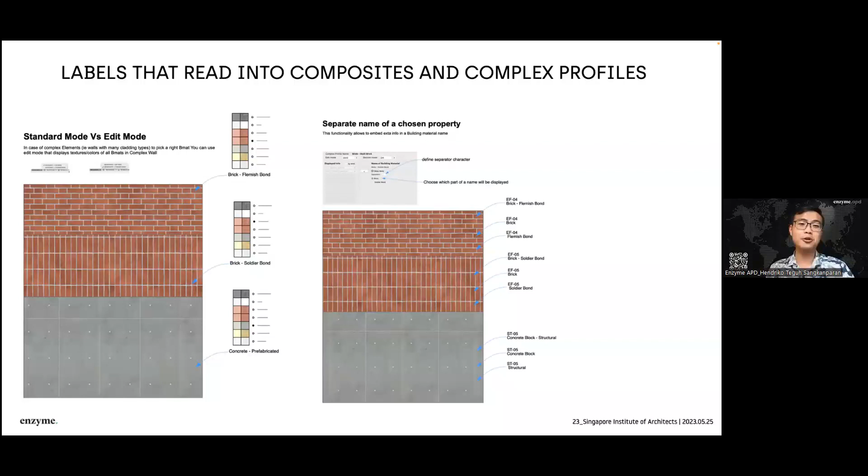This is a small video showing how this labeling tool helps us look into the system. You can change it, find what you want to use to analyze the brick, the render, or the insulation. All this information is already readily available in BIM, you just need to be able to access it, and this tool helps us understand the system very well.

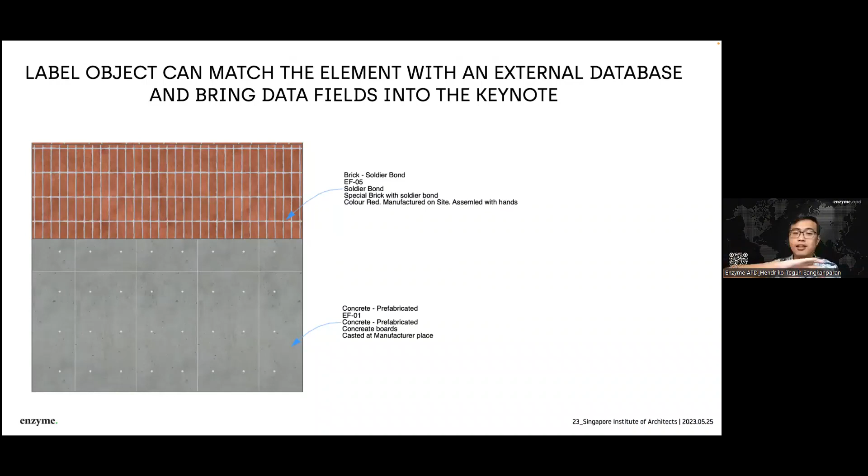You are able to add your own information if your locality has different kinds of data. Using this, you can replace the database according to what you need, and this helps you understand your building much better.

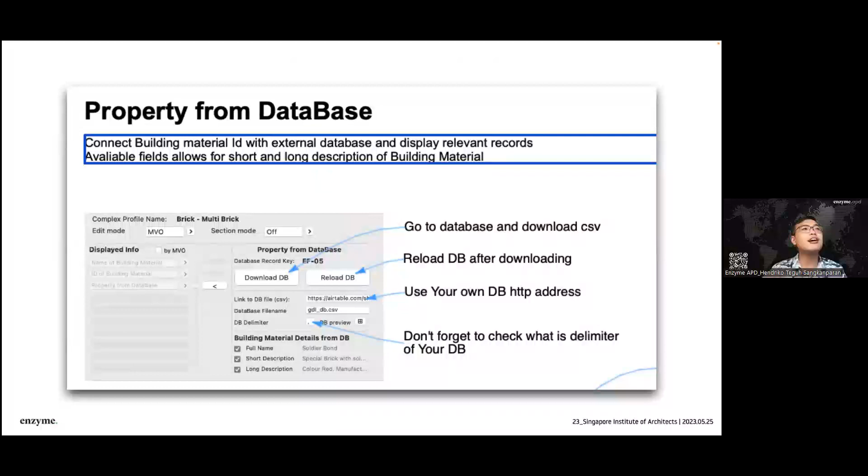Andy Thomson, who is our very good collaborator, used one of our other add-ons called the energy labeling tool. It's super interesting because with these composites you can label them and see the global warming potential, how the embodied carbon is being described for that particular composite.

Or maybe the last one is the thermal conductivity of the whole system itself, because maybe in Singapore it's not really important, but in the Western Hemisphere, extreme temperatures are affecting them on a day-to-day basis.

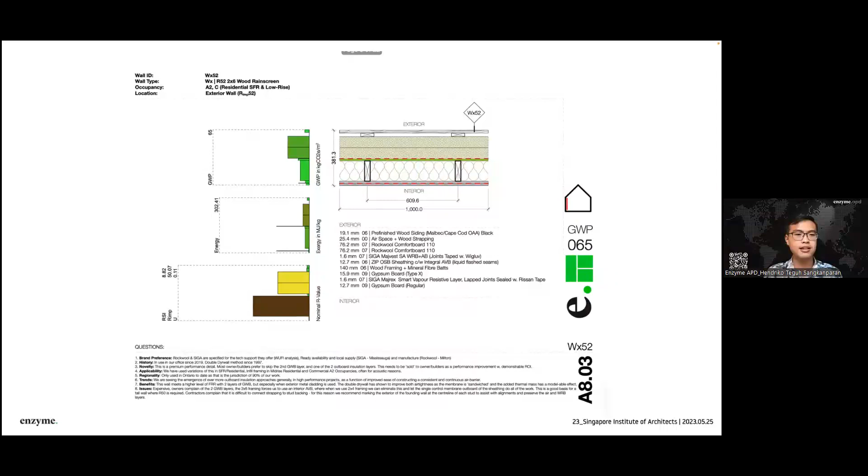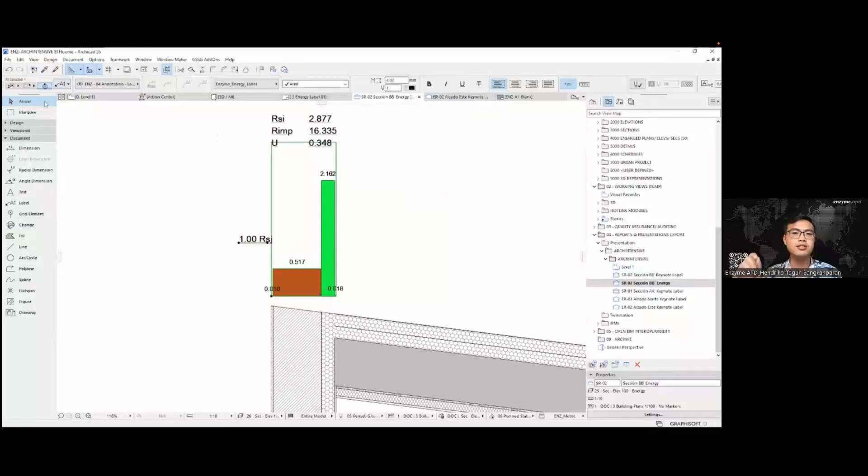This is super cool, and we hope these kinds of tools can help inform our design much better and communicate our decisions much better. With the highly customizable interface, it enables you to make sure this is working for your projects. It's very important for us to be able to understand this correctly, not just through text, schedules, or Excel.

The last thing we want to show you is this EcoDesigner. This is a built-in tool in Archicad that enables us to do building energy modeling within the project itself.

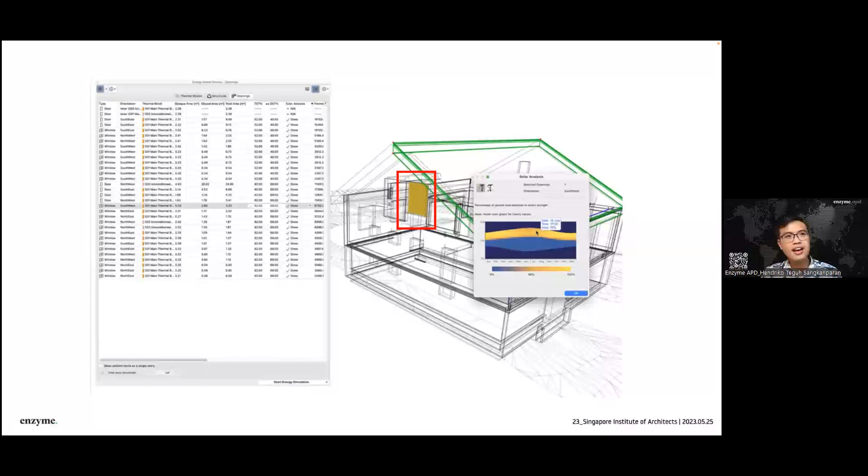You can select different things. For this example, in this small window, we can see how much solar gain, the solar heat gain, is being taken by this window. We can even look into the small details of when it is happening, or the reflectance of the project itself. With this information, we can look into solutions for how to mitigate these problems or opportunities.

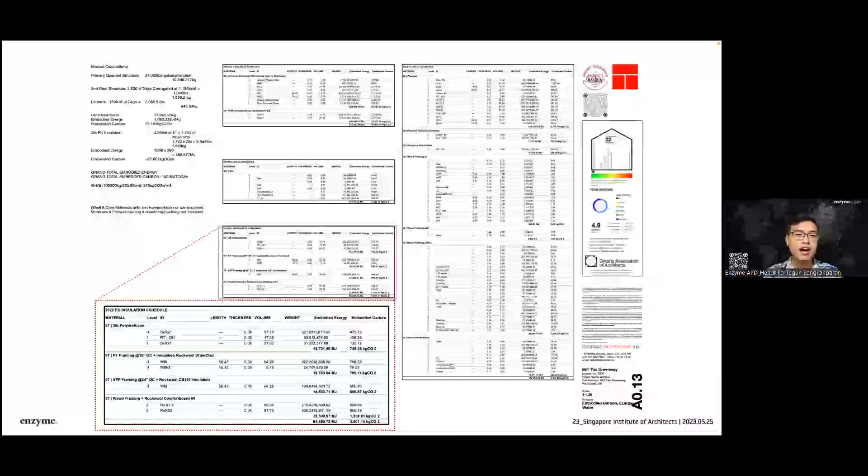Lifecycle analysis is a scheduling tool in Archicad as well, to help us understand the life cycle of every single material we have. This is very cool because when we update our materials, for example choosing composite A versus composite B, all this calculation is automatically pre-calculated, helping inform your design on how to improve it, or maybe no need to improve it anymore because it's already good.

These kinds of things are already readily available for us to use, and we hope we can use them much better and much more in the future. So this is the final slide for the whole thing.

The parametric design and BIM, right? We use technology to enable our design to achieve a high level of productivity, accuracy, and reliability. We hope you can also be inspired by us, in the sense that we can use this data and the tools that are already readily available, or even use our own customized tools for you. You can check our website, and maybe we can make the world even better.